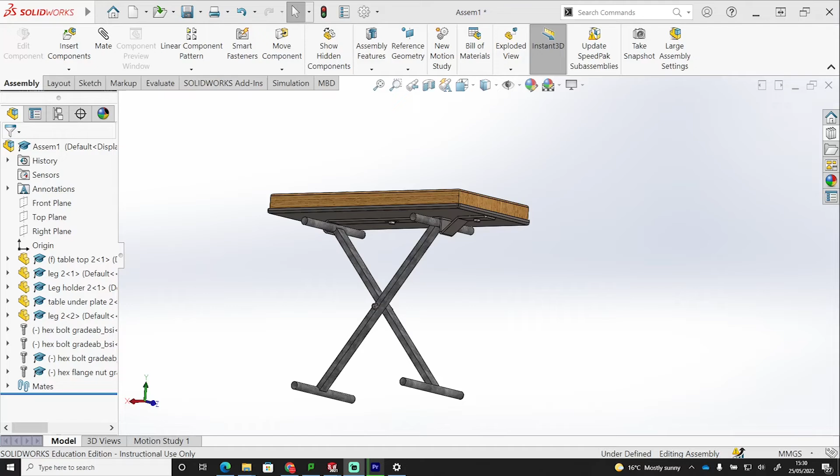So we've done the first two parts now. We've done the tabletop and the table under plate. So what we're going to have a look at now is the leg holder, this midsection here. This leg holder is going to connect underneath this plate, but it's going to have some interesting features on it. We're also going to do this in sheet metal work, so you'll see some sheet metal work features that we use within this little component. Let's dive in and see how we get on.

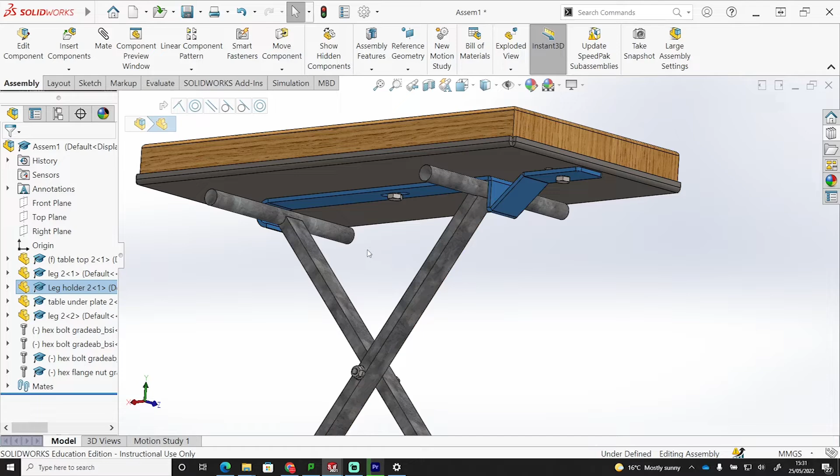This is going to be the leg plate, so the part that holds the legs underneath the top of the table.

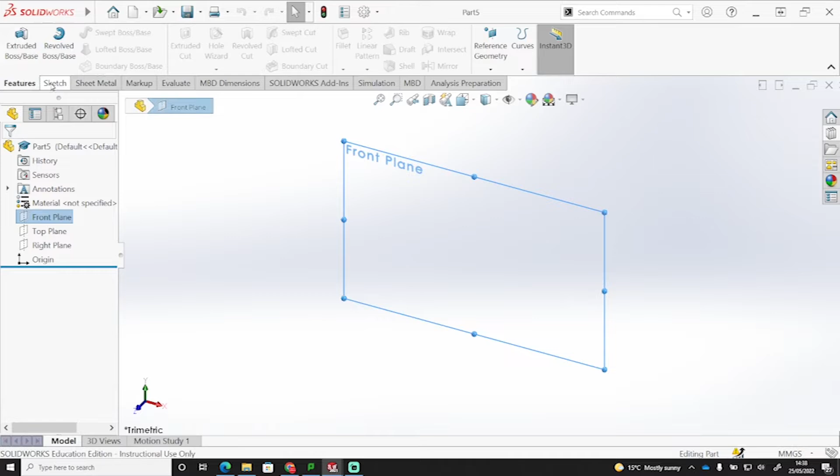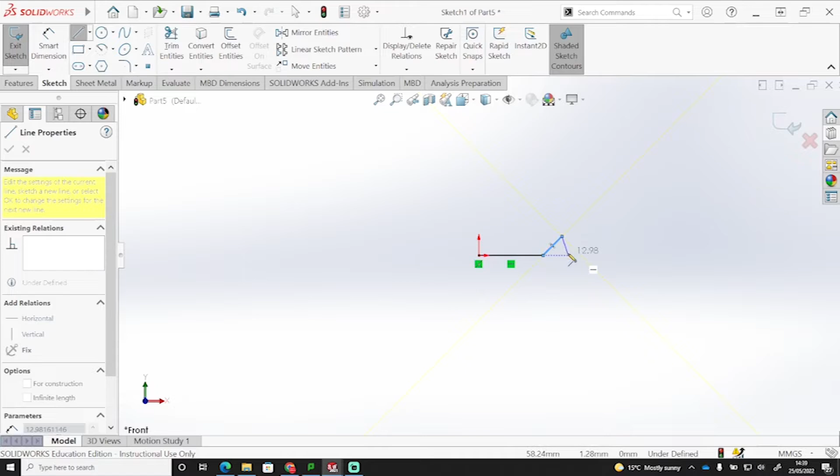What we're going to do is start off by creating a sketch for the outer profile of the leg plate that we're going to connect to the leg holder. So if I go to sketch, start a sketch on this front plane, I'm going to get a line and go through the origin, and I'm just going to sketch along the outline shape that I want, which is going to come up at an angle here, then straight down, and then across like so. So that's the outline profile that I want.

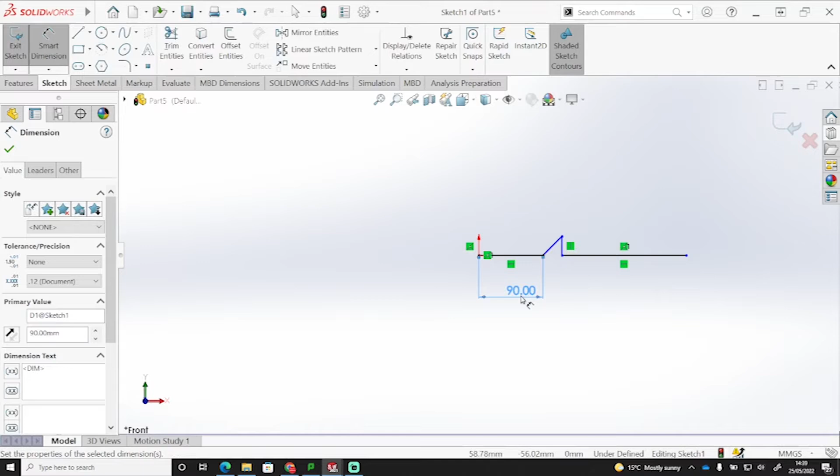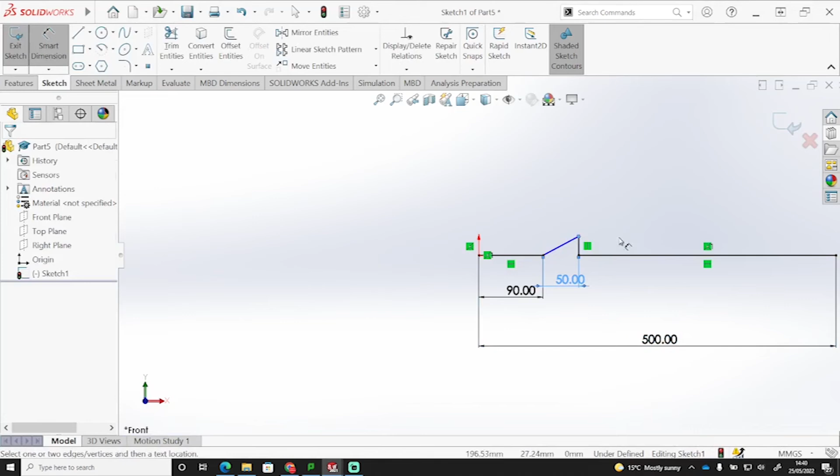I'm just going to put some dimensions to this. The first dimension is going to be from this edge, or this line here, which is going to be 90 millimeters long. Next dimension is going to be the overall length of this, coming down here, which we're going to say is 500. And then we're going to need some sizes for this bit, this little stick up bit, which is going to stop the leg from moving along. So we're going to say that's 50 wide, and it's 40 from there, for that section there. So this creates the profile that we want.

Now, rather than go to Features Extrude, I'm going to go to Sheet Metal. I'm going to go to the base flange, click on that, and create a base flange from this. Now I'm going to stick with my 5mm sheet. My bending allowance is still there at 0.25, that we stated earlier on.

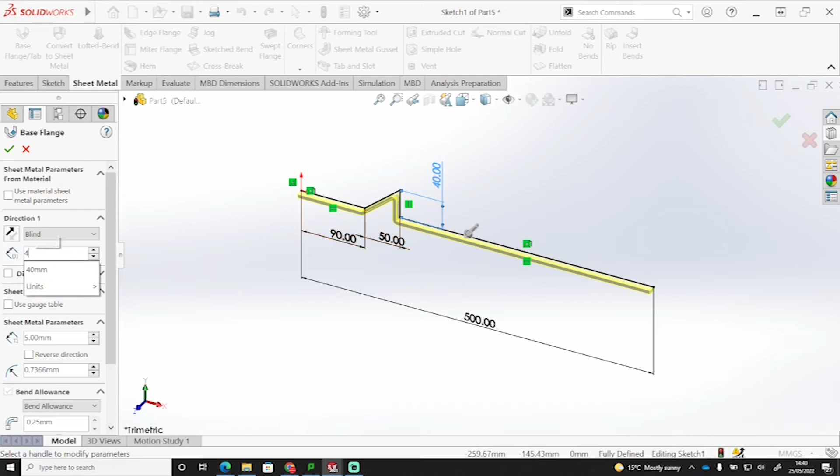Now I just want to decide how far this is going to come out, and its thickness for the material is going to be 45mm out. Yeah, we're going to do that 45mm out. So let's bring that 45mm out, like so. And we've got a plate section here, which is 45mm sticking out from that end there.

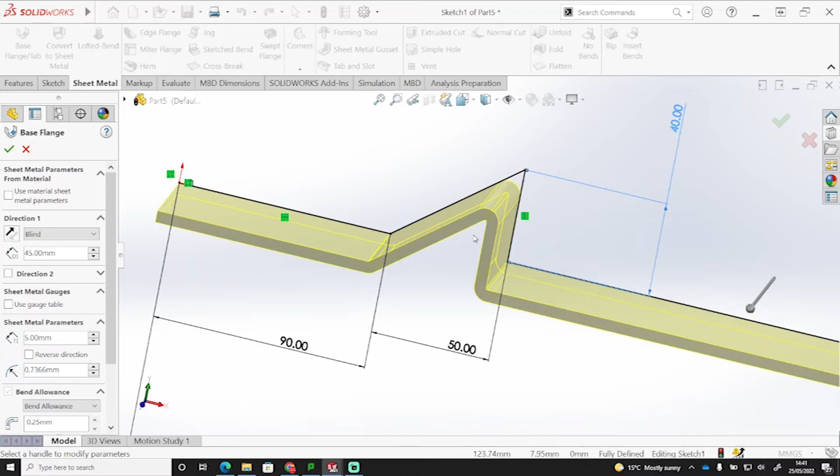Now we've got it 45mm out, what we can do is make sure that this feature here is not under the line, we want it above the line. Now the reason for this - if I follow this as my profile, this is going to be my under edge of my profile. So this black line is going to be the sketch under edge of my profile, not the upper edge.

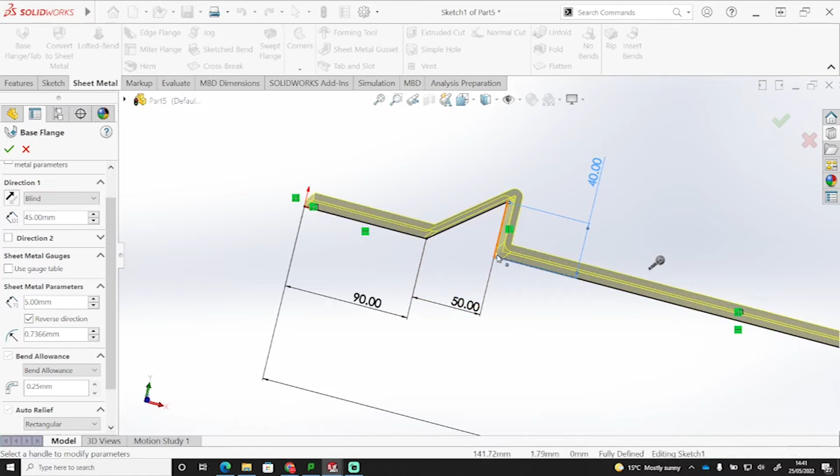So I want my extrude to be above that. Now if I want it to be above that, what I'm going to do is come down to where it says Sheet Metal Parameters, and reverse the direction. So that'll take it above the line, which means my bends are outside of that line, bar this top one, which will just bring it on the inner edge, and this one's on the outside of that line, like so. And that gives our sheet metal across that section. Tick there, and I get that shape that I was after.

Now, from there, I want to put in some sections to be cut out from this. This is where my bolts are going to go through. I want one here and one in this section here.

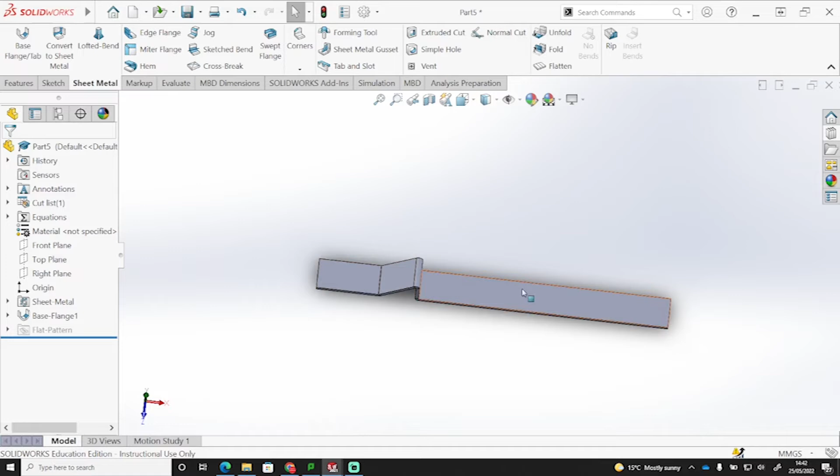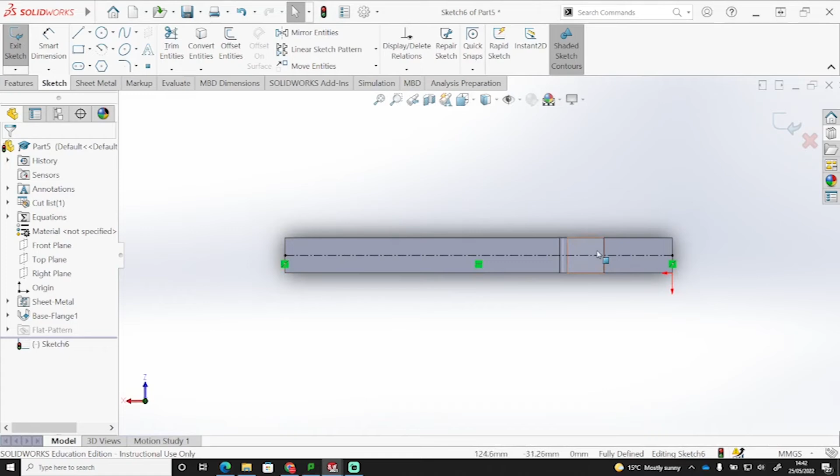If I click on this top face and sketch, I'm going to get a center line, and I'm going to go from here all the way across to this edge here, like so. Because those faces are aligned with each other, it doesn't matter that it goes through this, it's going to stay all on that face. Again, hit the space bar to take me back to where I want to go. It'll spin it around, it doesn't matter which way we're going.

So in this first section, I'm going to put a circle, just drop that in there. And in this second section, I am going to put a slot, and we're just going to drop that in there, like so.

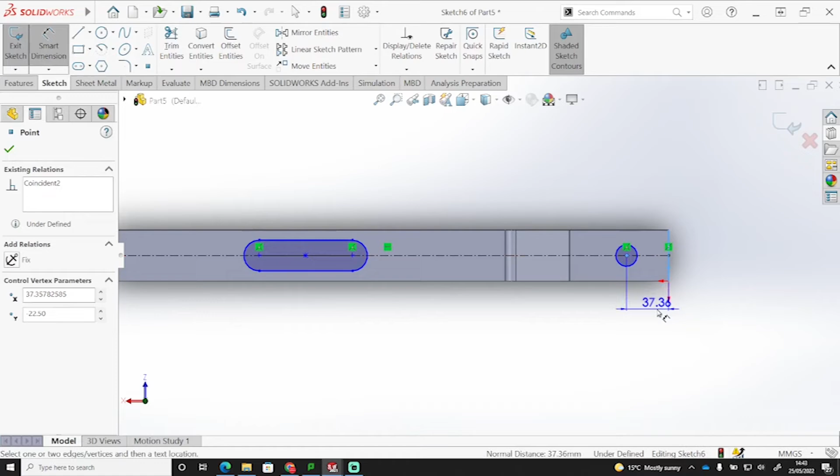Once I've dropped them in, I can put my dimensions to them. So this is going to stick out from this inside edge here by 45. And this is going to stick out from this bit, from this inside arc, to here by 300.

I want it 6 milli wide as a radius, so 12 diameter. That should give me clearance to get the bolt through. And I want this to be 12 diameter for the circle. So I've just dimensioned them up.

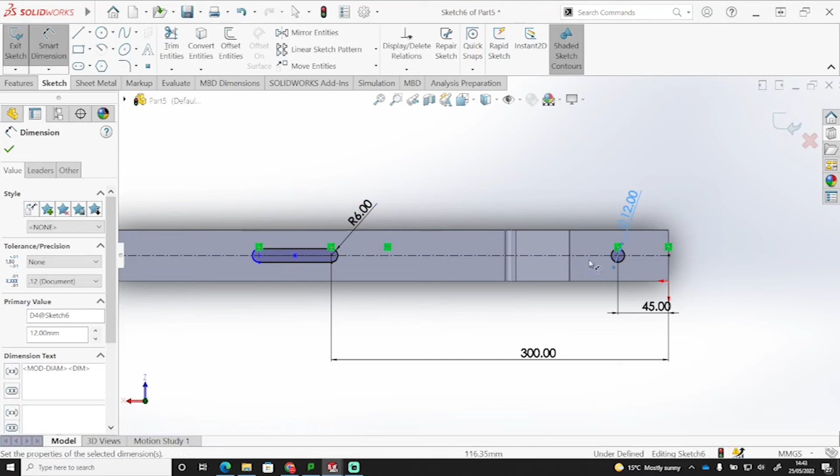Now the last little bit I want is to set the distance of this slot. So from here to here is going to be 30 mil long. Okay, so we've got that slot set in there.

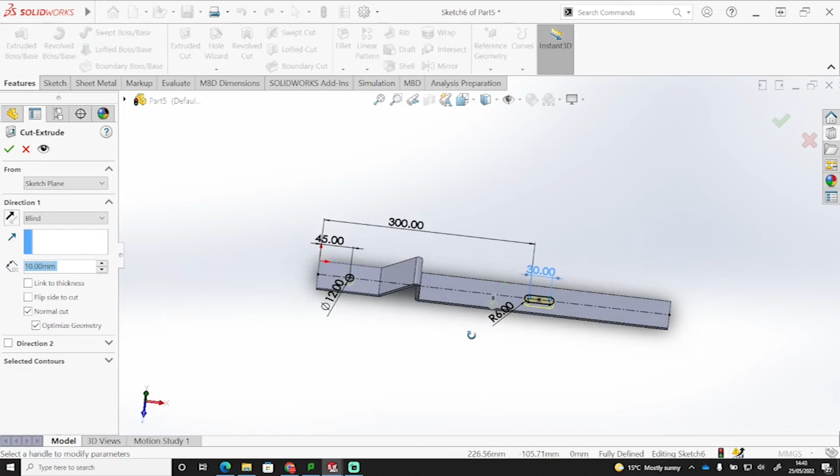Now I just need to extrude them through. So features and cut, and that will extrude them through this sheet. Tick like so. Okay, so we've got that in place.

Now I've got two sharp edges, I want to radius them off. So to radius them off, I'm just going to fillet this end and this end here. That'll just round them off.

Now it's saying that they're 10 mil at the moment. 10 is quite a big radius on there, I'm just going to set it to 5. Just a nice little radius on the corner.

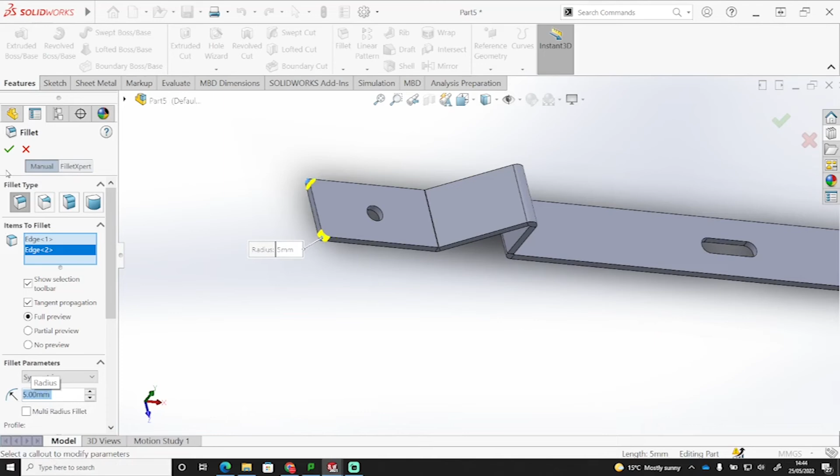Okay, now the last bit is, this is going to stop the legs from going too far that way, but I want something on this end to stop it coming out. So what I'm going to use, if I go back to sheet metal, I'm going to use a hem, which is an arc that's going to come around here and stop the legs from going past the end.

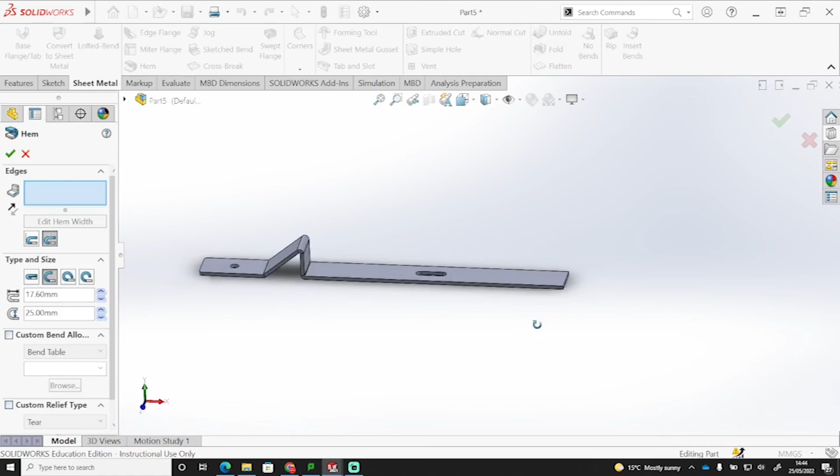So if I click hem, and I click this outside edge here, it'll put an arc on. Now the arc automatically is coming at 25. Now the legs that are going to fit into this is 20 mil, so actually 25 is pretty good size, so we'll keep it at that.

But I just want to show you a couple of things before we move on. So first of all, we've got a couple of options of how our hem can look. We can either start the hem from the end of the material here, or include it into the length of the material, like so. I prefer to have it on the end because I want this section to be the right length.

And then we can select how it looks. Do we want it to be rolled, teardrop, open, or do we want it to be closed tight? Now I want it to be open because I want it to stop the bar from coming off the end, but you could have it any depending on what your application's for.

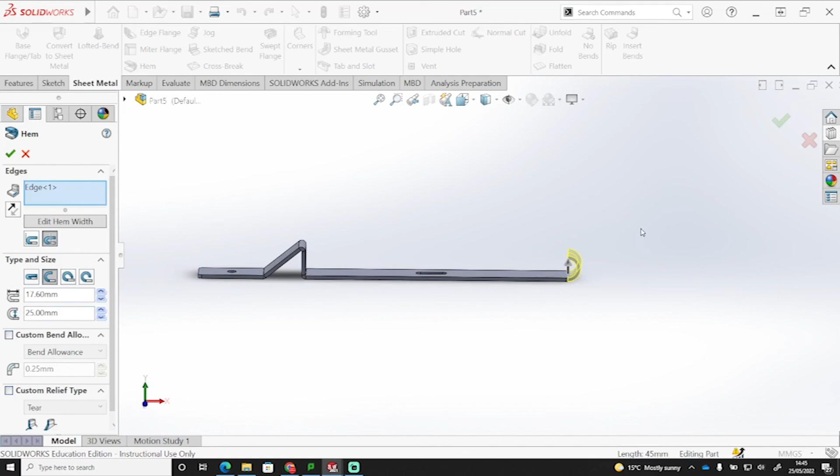You'll see, because we put the bend allowance in earlier, that the bend allowance is still there of 0.25. I can change that if I click on custom, but at the moment that's exactly how I need it to be, so we'll leave it there. We're happy with that. I'm just going to tick, and we've got that shape like so.

We just need to apply a material to this. So if I go to materials, edit the material, and we'll stick with that carbon steel sheet like we have done in the past, and apply and close.

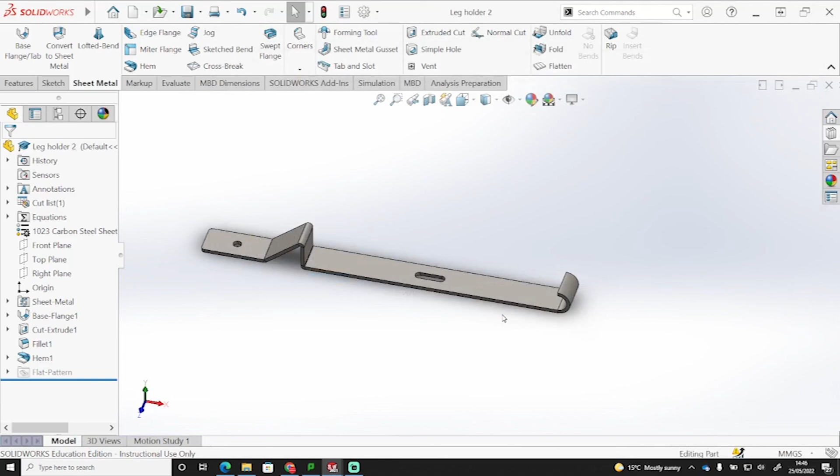So from there, we're just going to save that file, save as. We'll make sure it's leg holder 2 and save. So that's just saving that component. Now the last component that we need to make is the legs.